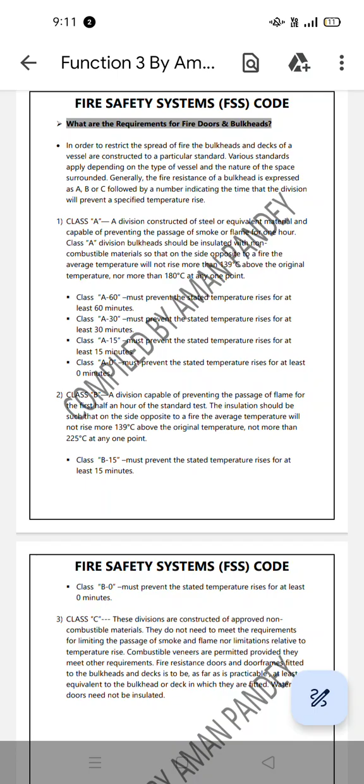And C kind of bulkhead, fire door bulkhead, doesn't have any specific requirements of A and B, but it says that it should be equivalent to the bulkhead wherever it is fitted. So I'm not remembering the temperature. So what I missed is A30, A60 I got correct, A30 and A15, not 20.

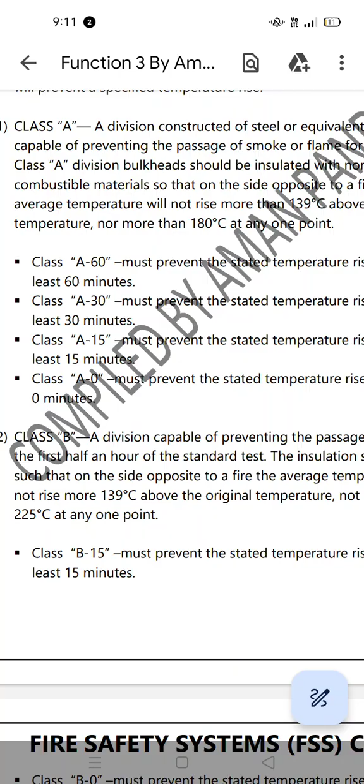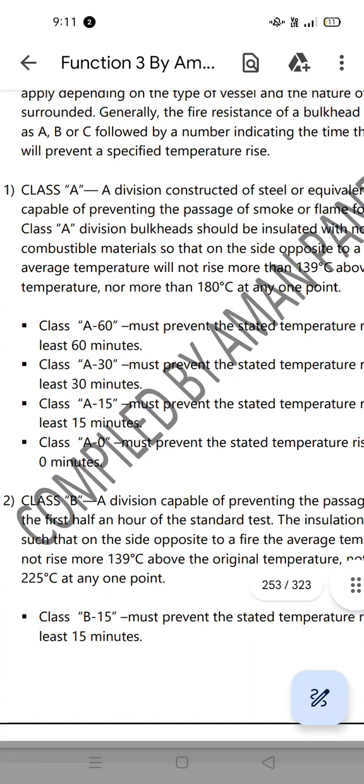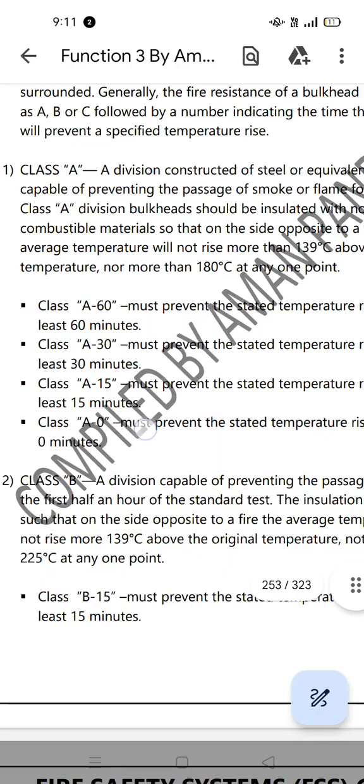Okay. Now, a division constructed of steel or equivalent material and capable of preventing the passage of smoke or flame for 1 hour. Division bulkhead should be insulated with non-combustible material so that on the side opposite to a fire, the average temperature will not rise more than 139. I guess I've told 139 only. So 139 and maximum 180 degrees above.

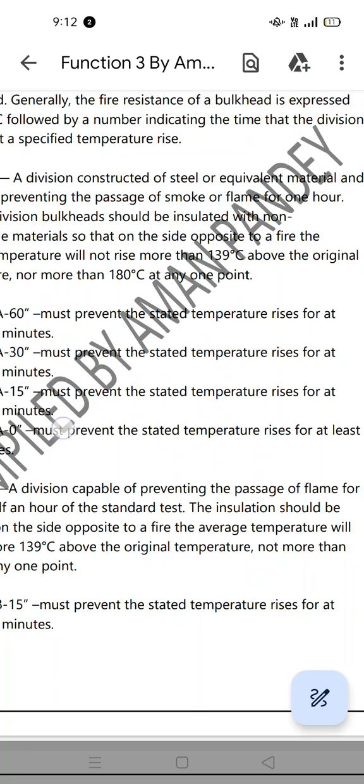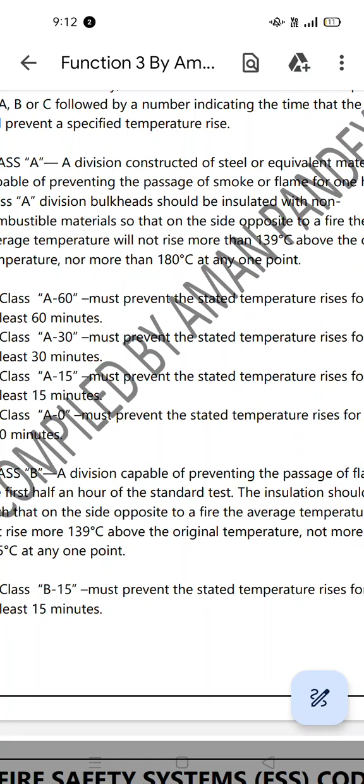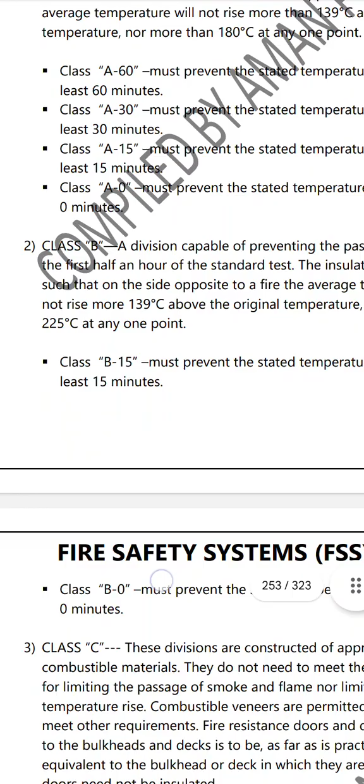I guess I have told 150 if I'm not wrong. So it's 139 and 180, and the other is 225 if I'm not wrong. 180 and 225. So 225 is there when 139 is there. Oh, so again I made a mistake. B15 and B0. Okay, so B0 is there. So this we have to remember.

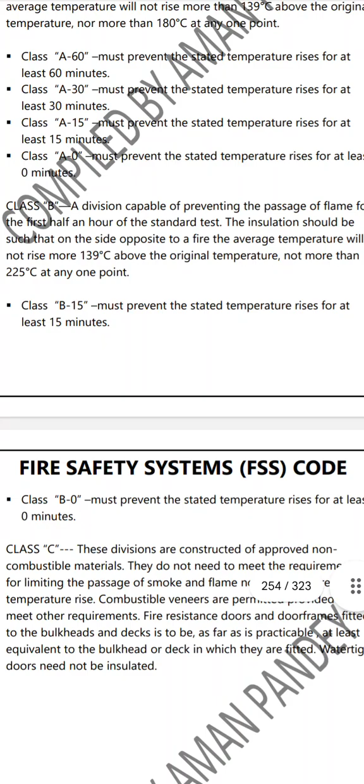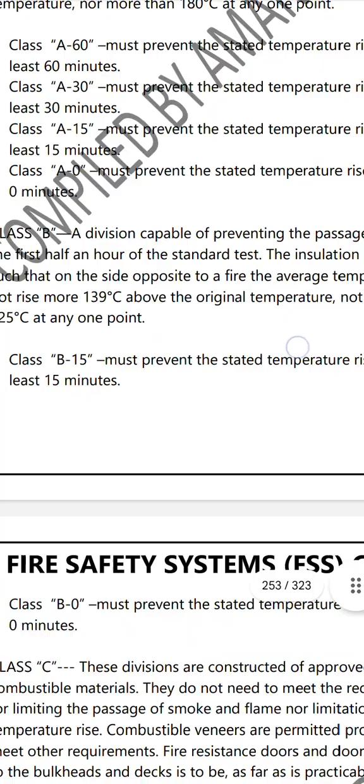Must prevent the stated temperature for at least 30 minutes. Okay, and there is insulation capable for the flame for half an hour. Okay, so this is very important. I missed the part, that is half an hour. The division is capable of preventing the passage of flame for the first half an hour, and for smoke also it's written.

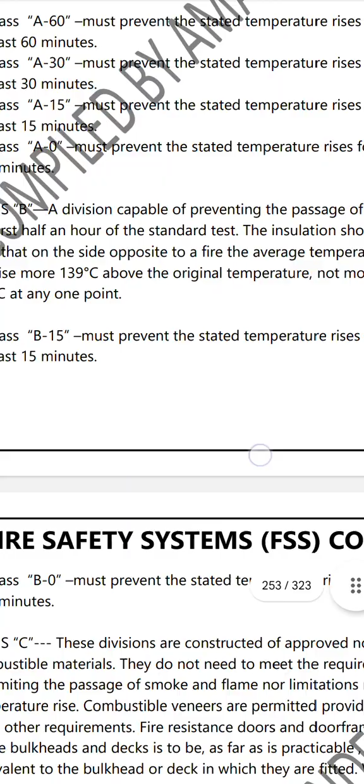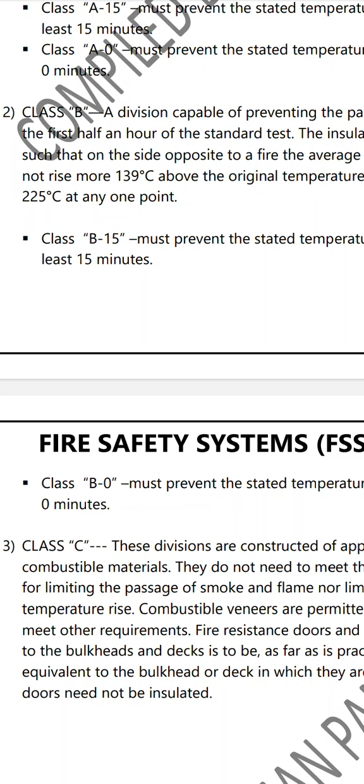For half an hour of the standard test, the insulation should be such that on the side opposite to a fire, the average temperature will not rise above 139 above the original temperature, nor more than 225 at any one point, and B15 must prevent. Okay. So class C, these divisions are constructed of approved non-combustible material, do not need to meet the requirement. And class B must prevent this.

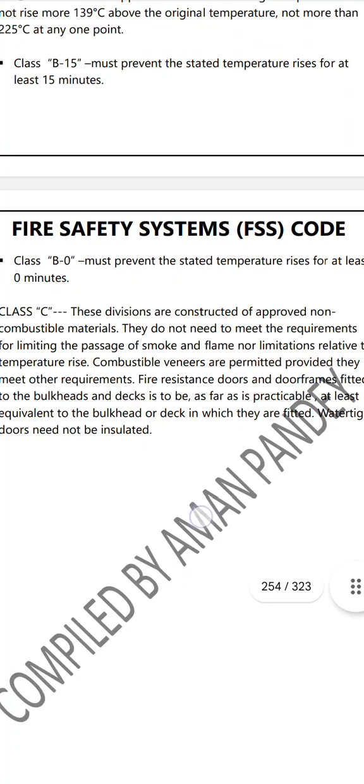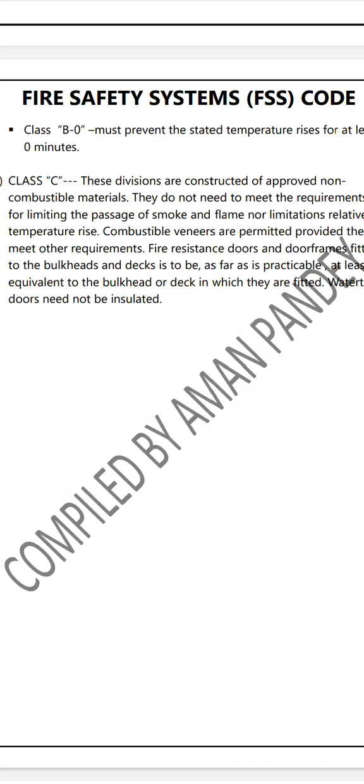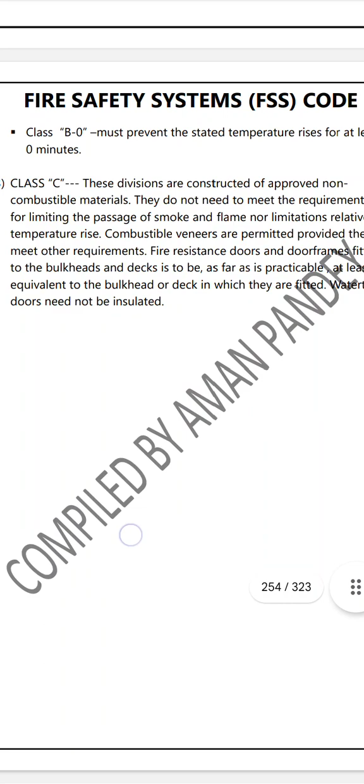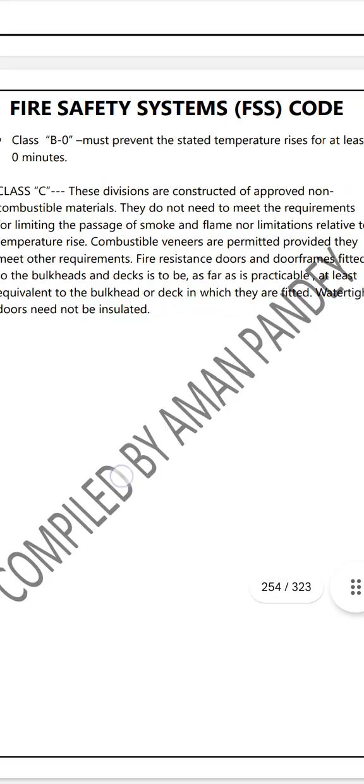C divisions are constructed of approved non-combustible material, do not need to meet the requirement for limiting the passage of smoke and flame, nor limitations relative to the temperature rise. Combustible veneers are permitted provided they meet other requirements. Fire resistant doors fitted to the bulkheads and decks are to be as far as practicable at least equivalent to the bulkheads or deck in which they are fitted. Watertight doors need not be insulated. Okay, so this is all about your doors.

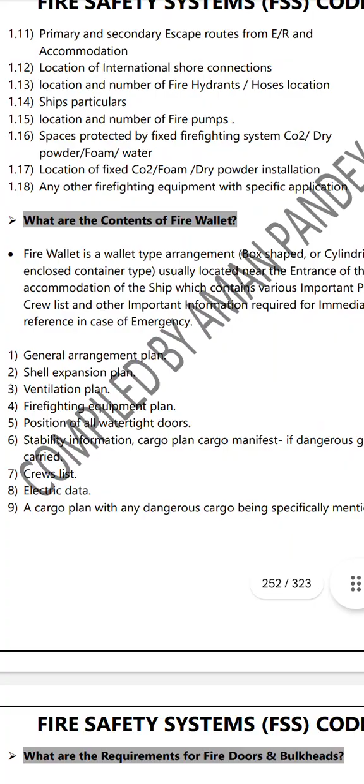Now, what are the contents of fire wallets? So, what does the fire wallet comprise of? Fire wallet basically comprises the cargo storage plan, then general arrangement plan, if necessary, storage plan, and MSDS of the cargo stored, and fire control plan, and total crew list, and emergency contact details, in case of an emergency whom they have to contact.

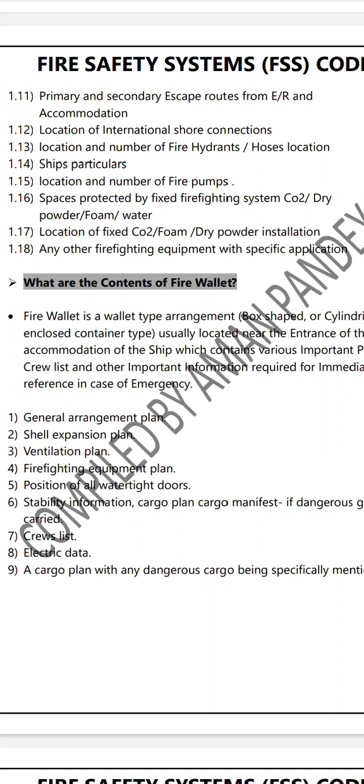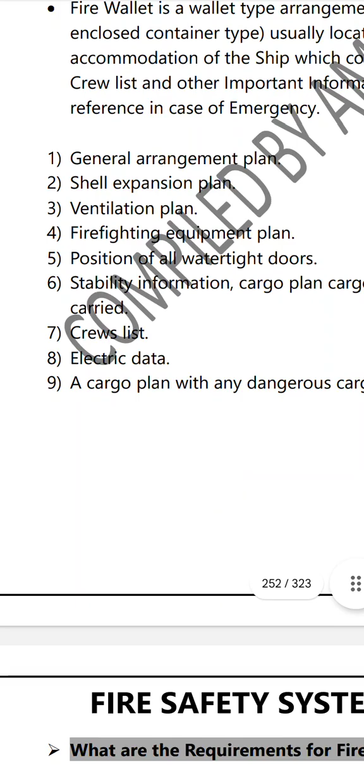And that's all about. More details can be added as well, like general arrangement plan, shell expansion plan, ventilation plan. I don't know why it mentions the ventilation plan. Okay, ventilation plan, fire equipment plan, position of watertight doors, stability information, cargo plan, cargo manifest if carried, crew list, electric data. Okay, electric data, cargo plan with any dangerous goods.

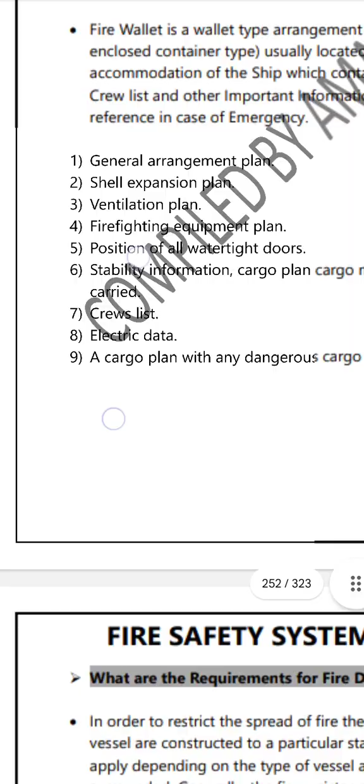I don't know. This is totally bullshit, I guess.

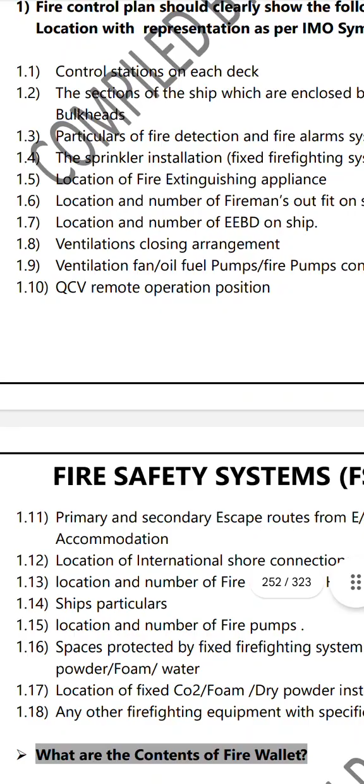Now, what are the contents of a fire control plan? So, what does the fire control plan consist of? So, there it is written 18 points. So, the fire control plan gives the location of emergency escape devices, location of the fire extinguishers placed in accommodation in all the ships, and locations of all the ventilation systems as well.

And it also gives the details of the type of fire doors, and it gives the details of locations of the SCBA sets, and location of the fire station, location of quick closing valves, and the location of

location of all the ventilation which has to be stopped, and location of all the fire control plan, and it also consists of all the detection, fire alarm detections, fire smoke detectors, location of that, then general alarm, a fire alarm where it can be used to raise the alarm. Yeah, this is all which I remember.

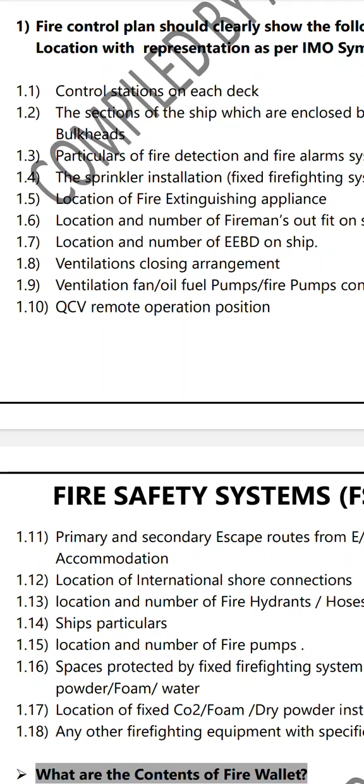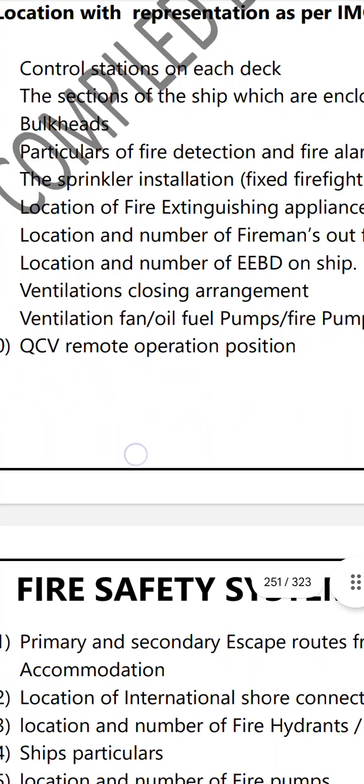Let's see what's written here. Control stations on each deck. So they have said sections of the ship which are enclosed by fire resisting bulkheads, control station on each deck, particulars of the fire detection, fire alarm systems, that is smoke detection systems, the sprinkler installations. Okay, sprinkler installations, location of fire extinguishing appliances, location and number of firemen's outfit on ship, location and number of

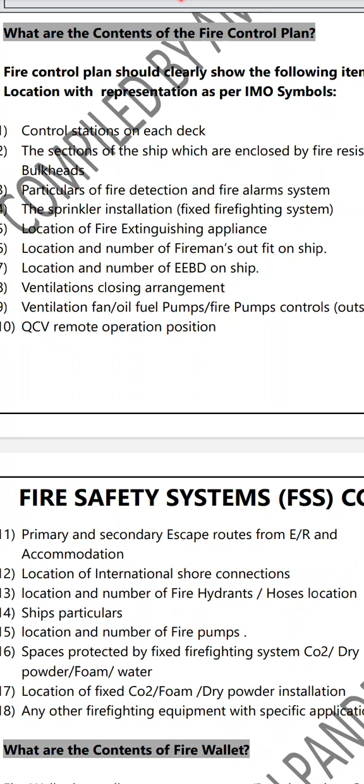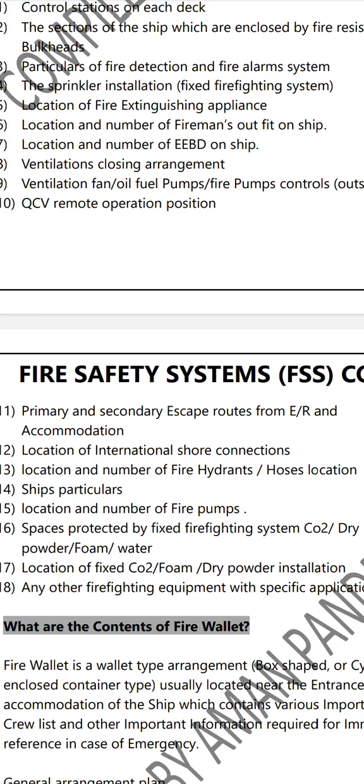EEBD on ship, ventilation closing arrangements, exactly, ventilation fan, fuel oil, fire pumps, control, etc., quick closing, remote operation positions, exactly, primary and secondary escape route from engine room and accommodation. Okay, primary and secondary escape from engine room and accommodation, location of international shore connection. So this I have missed.

Location of international shore connections, then locations of fire hydrants and hose locations, ship particulars, location and number of fire pumps, spaces protected by fixed CO2. This is a big blunder which I have done. Locations of all the fixed CO2 and fixed dry powder, any other fixed appliances. Okay.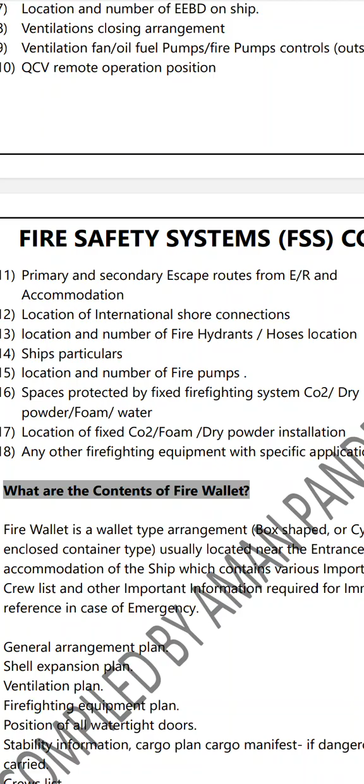Now coming to the working of DCP, how the DCP works. So DCP works on the basis of nitrogen cylinders, and once a piston of a nitrogen cylinder is released, then it goes to the main container and builds the pressure, and simultaneously it builds the pressure to the other cylinders of nitrogen, which release the gases and create pressure on the container, and the same opens the distribution valve as well.

This distribution valve, after reaching a certain pressure at the container, releases, and from this distribution valve the release of fixed DCP takes place. So this is a very basic idea which I know. I guess I missed something. The first thing is that we have to open one cylinder valve, and from that it will go directly to the container, and it will open the distribution valve, and simultaneously the other cylinder pressure will also create a pressure on the main container, right?

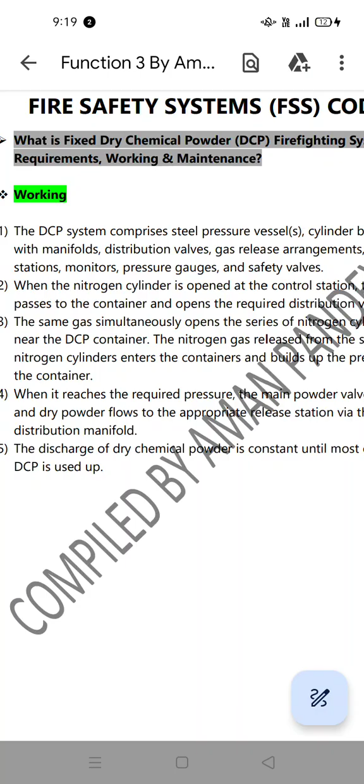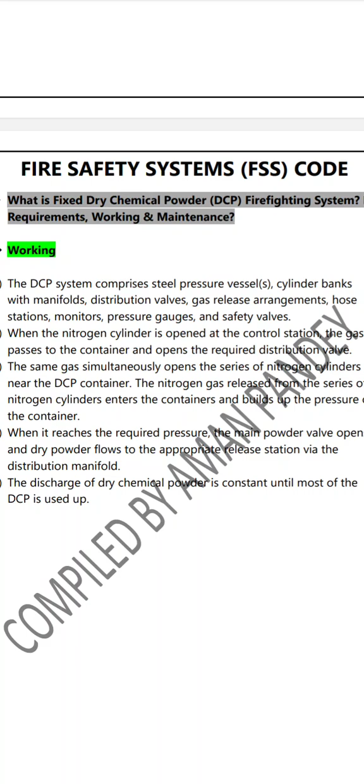So what is the name of the main container, and what word I have to use to say what we initially do. The DCP system comprises steel pressure vessels, cylinder banks with manifolds, distribution valve, gas release arrangement, hose station monitors, pressure gauges, and safety valves. Cylinder banks with manifold, distribution valves, gas release arrangement, hose station, monitors, gauges, and safety valves.

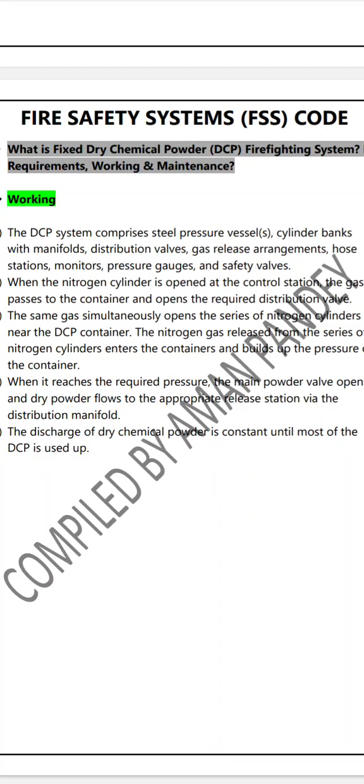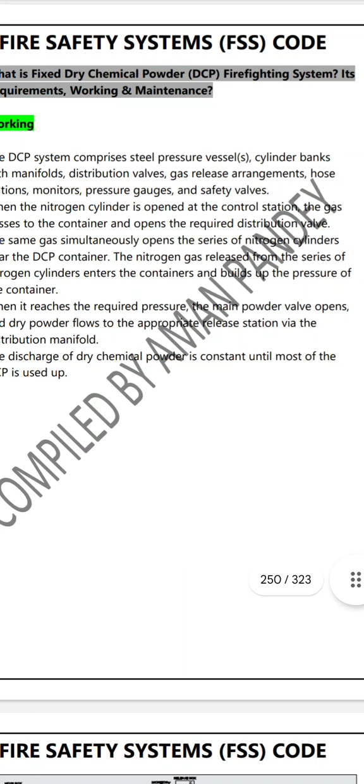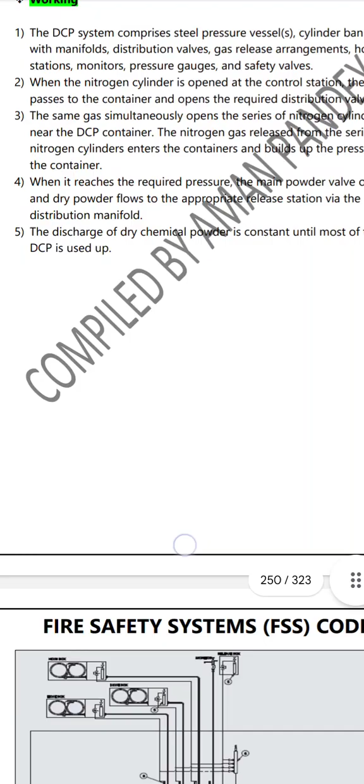When the nitrogen cylinder is opened at the control station, okay, I have to use the word control station, the gas passes to the container and opens the required distribution valve, and the same gas simultaneously opens the series of nitrogen cylinders near the DCP container. The nitrogen gas released from the series of nitrogen cylinders enters the container and builds up the pressure of the container. When it reaches its required pressure, the main powder valve opens and dry powder flows to the appropriate release station.

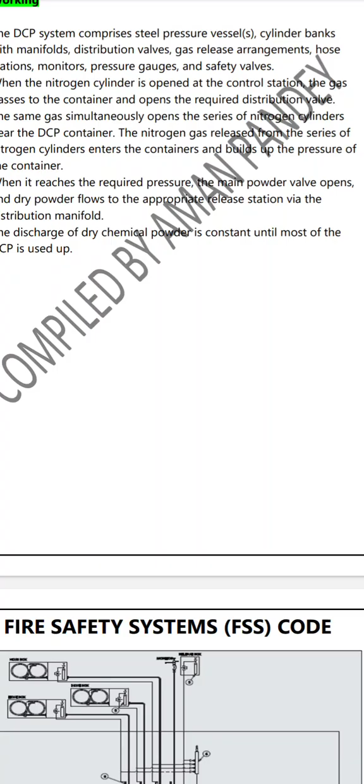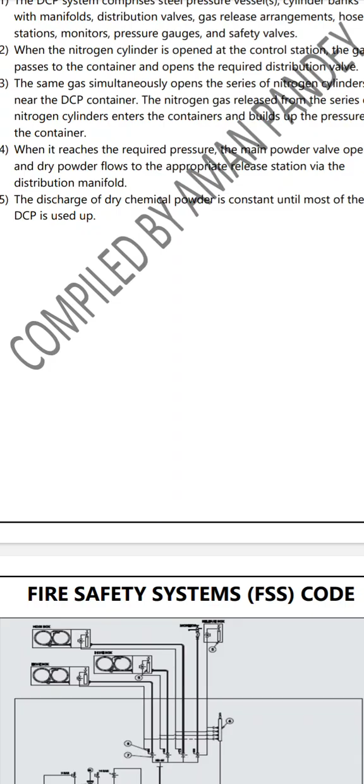So I have to use the main powder valve. I have missed this word. Main powder valve will be open, and from that the extinguishing will take place. And dry powder flows to the appropriate release station via the distribution manifold. The discharge of dry chemical powder is constant until most of the DCP is used up.

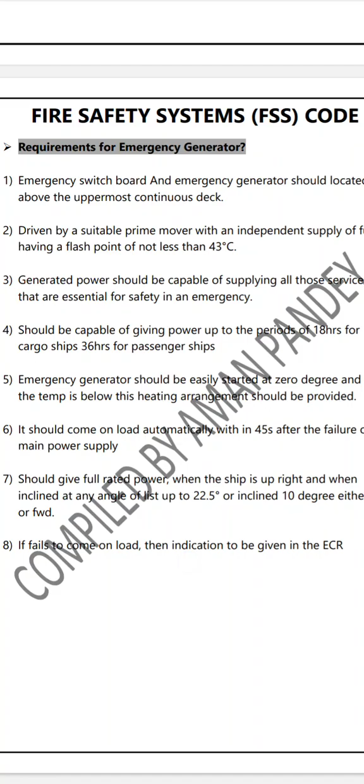Okay, now requirement for emergency generator. I guess it's a bit important question, we need to have it by heart. So emergency generator, the requirement is that it provides a source for the equipment which has to be used in emergency, critical equipment which needs energy sources like the navigational equipment and main engines and all. And deck lights, emergency deck lights and all.

So it will give power source to that, and at the same time it should come on load within 45 seconds. If it does not come on load, visual and audio alarm should come in the ECR. Apart from that, within 45 seconds. Okay, now it should be able to work at 0 ambient temperature easily, and if the temperature goes below that, a proper heating arrangement should be there.

And another requirement is that this generator should be able to work in rolling and pitching of 10 to 22.5 degrees, and the flash point of the fuel used in this generator should be at least 43 degrees Celsius or more. And apart from that, in passenger vessel it should be able to work for 36 hours, and in cargo vessel it should work for 18 hours. And anything which I have missed.

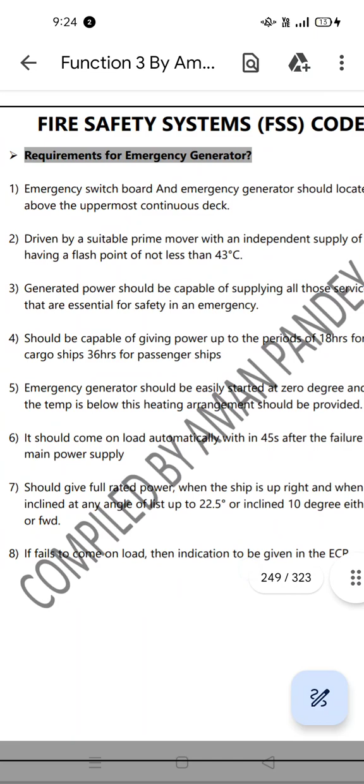The requirement says that the emergency switchboard and emergency generator should be located above the uppermost continuous deck, with a driven prime mover having an independent supply of fuel with a flash point not less than 43. Generated power should be capable of supplying all services essential for safety in an emergency: 36 hours for passenger ships, 18 hours for cargo ships.

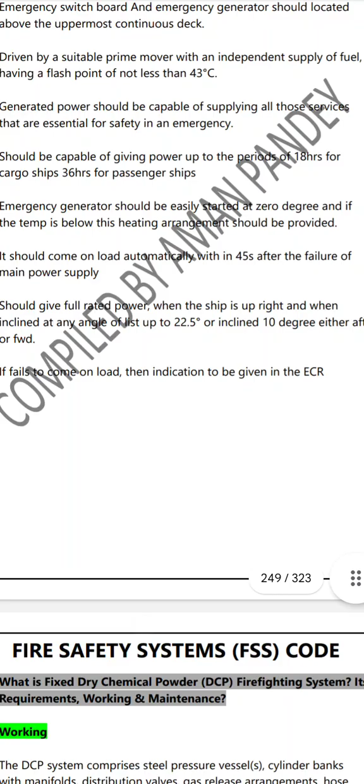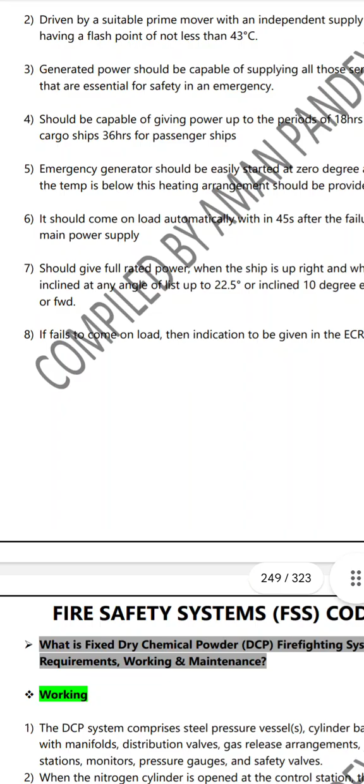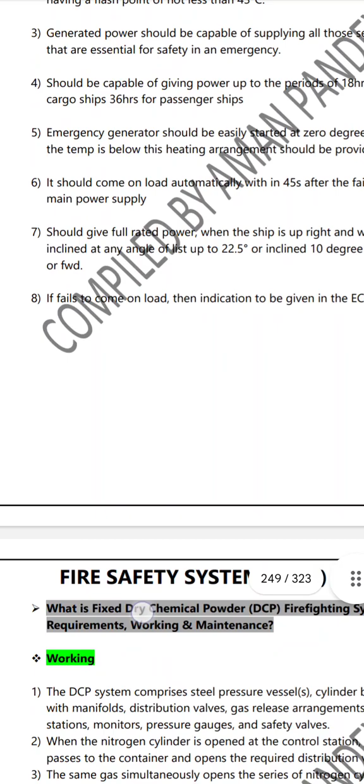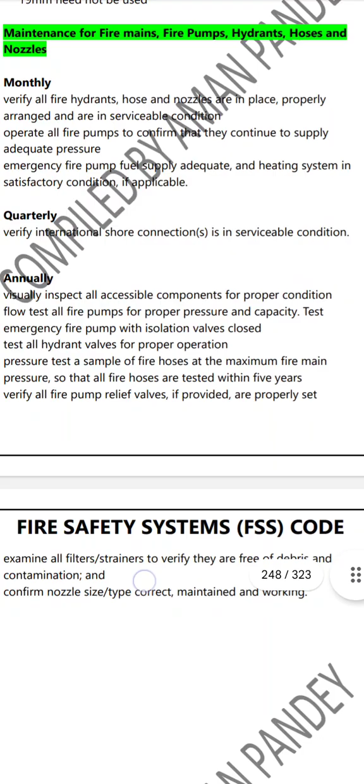Maintenance for fire main, fire pumps, hydrants, hoses and nozzles: what I have seen on board, there isn't a strict requirement as such, but there is a proper PMS schedule which I have seen, done on a monthly basis.

On the point of nozzles, you open the fire box and check whether it has proper nozzles, hose in proper condition, a key for it, and couplers. The hose should not need inspection itself, but the box should be checked for good condition and should have a proper locker so the hose is kept in the box in good condition.

Apart from that, the fire hose, nozzle and hydrant should be checked on a monthly basis - the hand wheel of the hydrant should be free and should not get stuck while using it, so it should always be free.

On an annual basis, fire hose testing should be carried out - though it's not strictly annual, it is to be completed within 5 years. Normally the company, as per SMS, wants all hose testing done within 1 year, such that over 5 years all hoses are tested, and any worn out or damaged hose should be rectified and replaced.

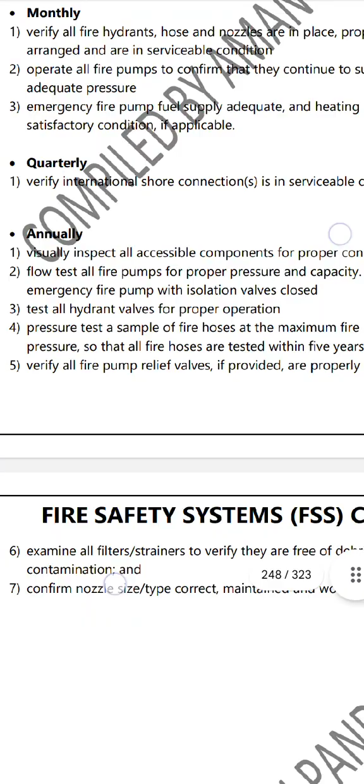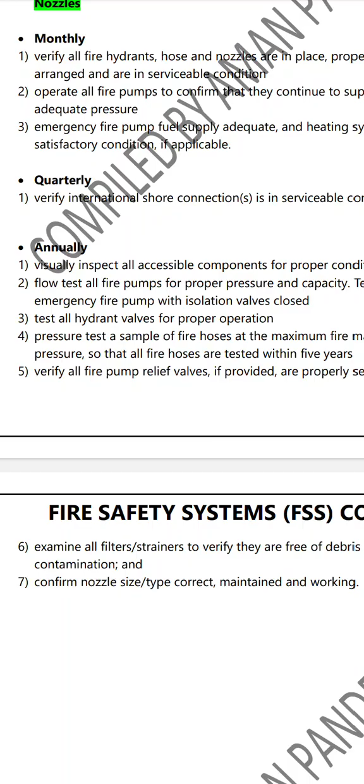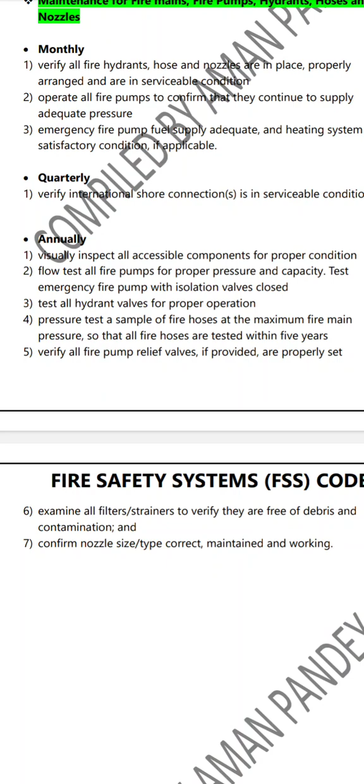Flow test all fire pumps for proper pressure and capacity. Test the emergency fire pump with the isolation valve closed.